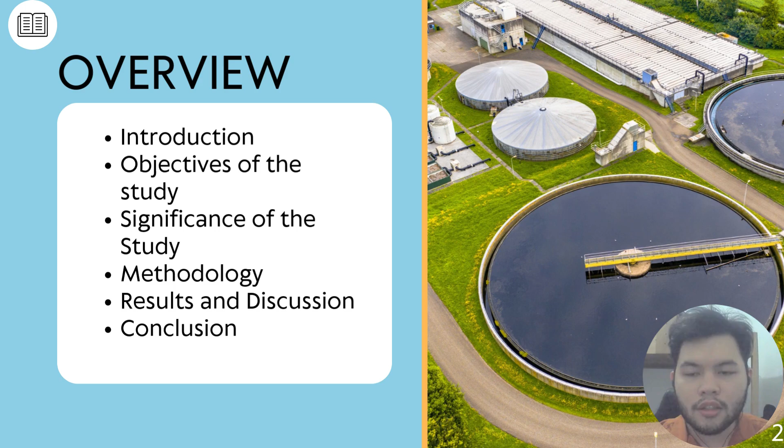Access to clean water is crucial for human well-being as it plays a vital role in ensuring food security, energy production, and economic development. Due to large increase in population, sewage wastewater became prevalent. The sewage wastewater contains pollutants that can significantly affect the environment. In the Philippines, there are 331 municipalities classified as waterless communities, where over 50% of the impoverished population lacks access to clean water, putting them at risk of illness. The Department of Interior and Local Government, or DILG, defines those communities as waterless communities.

The colloidal nature of wastewater makes coagulation flocculation an effective approach for sewage wastewater. The physical attraction between the negative charge of the contaminants and the positive charge of the coagulant induces solid-liquid separation.

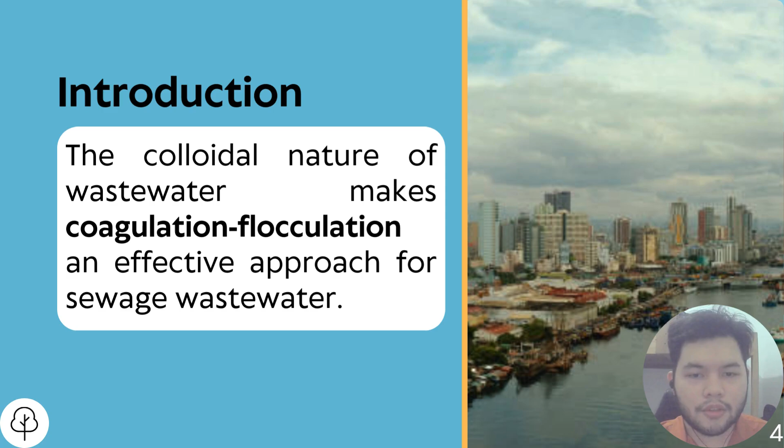Our study aims to optimize sewage wastewater treatment parameters, mainly pH level, coagulant dose, and settling time, using response surface methodology (RSM), specifically the Box-Behnken Design (BBD) model.

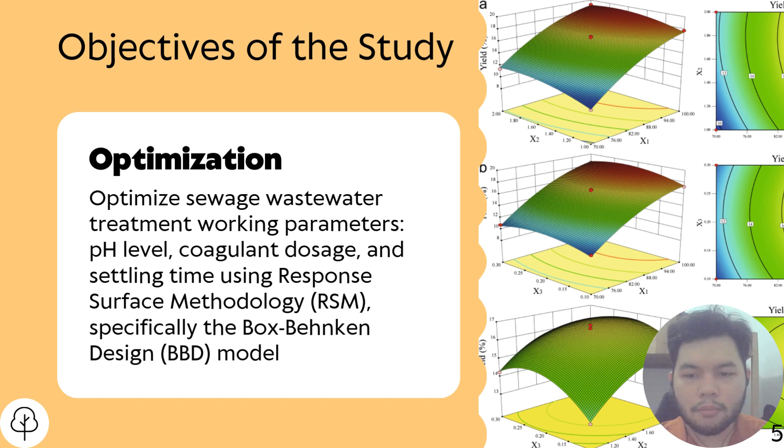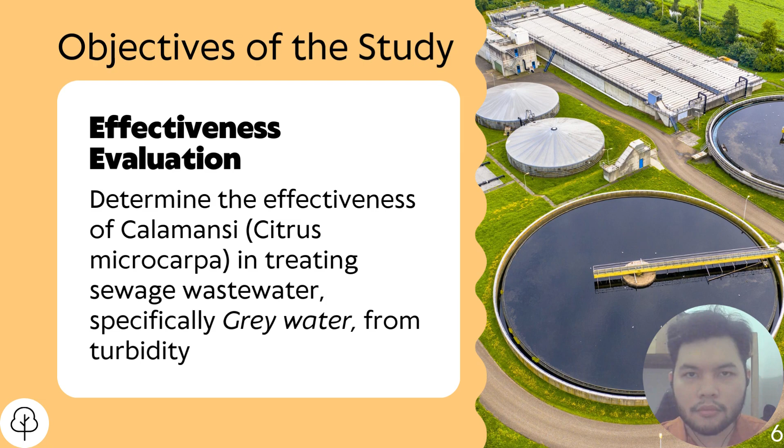Our study also aims to determine the effectiveness of calamansi in treating sewage wastewater, specifically greywater, for turbidity. Finally, our study aims to determine the biochemical oxygen demand and the chemical oxygen demand percentage upon determination of the optimal parameters.

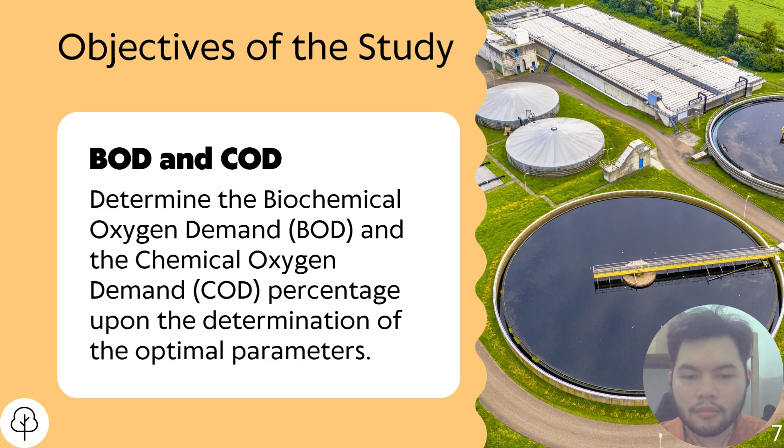As for the significance of our study, the proposed coagulant could be a cheaper and more sustainable alternative, and the coagulant could reduce the environmental impact of the treatment process of sewage wastewater. Our study could contribute to the research of natural coagulants as a viable, eco-friendly alternative for treating sewage wastewater.

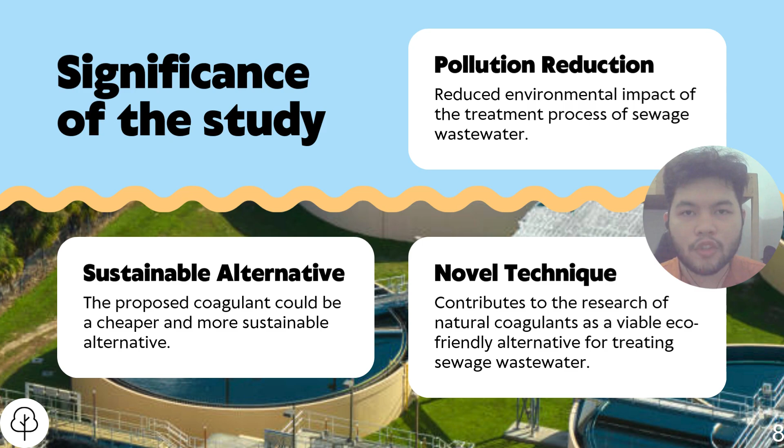This research also conforms with the Sustainable Development Goals mandated by the United Nations. The first goal is SDG 6, the Clean Water and Sanitation for All goal. Considering that our field of study is aimed towards wastewater treatment, the second goal is SDG 12, the Responsible Consumption and Production goal. By reusing calamansi waste, we promote a more sustainable way to treat wastewater.

The third goal is SDG 14, the Life Below Water goal. By reducing water pollution through effective wastewater treatment, and by using calamansi as a natural coagulant, it also helps in lowering harmful pollutants like BOD and COD, preventing water contamination, and protecting aquatic ecosystems.

The last goal is SDG 15, Life on Land. By promoting sustainable waste management, we reduce environmental pollution and also help protect land-based water sources and biodiversity with cleaner wastewater discharge.

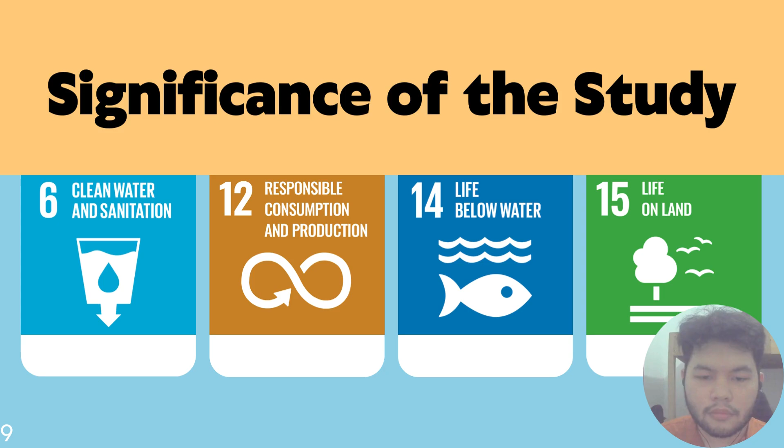For our methodology, the wastewater sample was obtained from the wastewater treatment plant located in Pasay City by providing sample containers to store the sample. The calamansi waste samples were obtained from local wet markets in Sucat, Parañaque City.

The obtained calamansi were subsequently processed as a natural coagulant. Additionally, the sample characterization of the wastewater parameters was done in a laboratory setting with the necessary equipment to proceed with the test.

MacUnion Laboratories Incorporated provided the wastewater sample analysis services to help provide data for wastewater parameters. The wastewater parameters such as COD and BOD are prominent in sewage wastewater, and wastewater sample analysis provides foresight as to what it may contain.

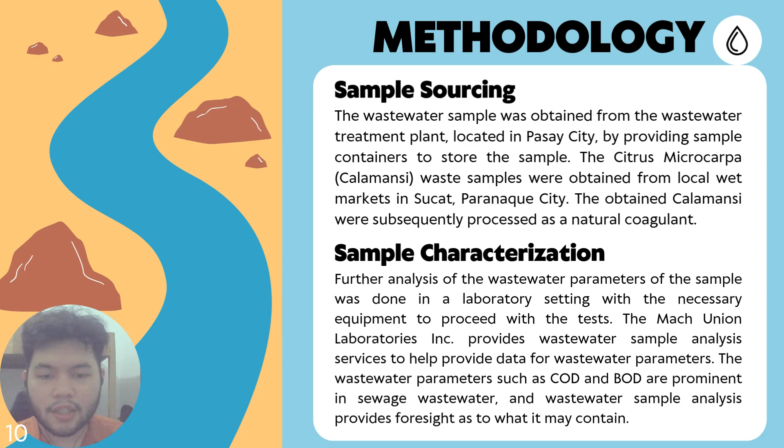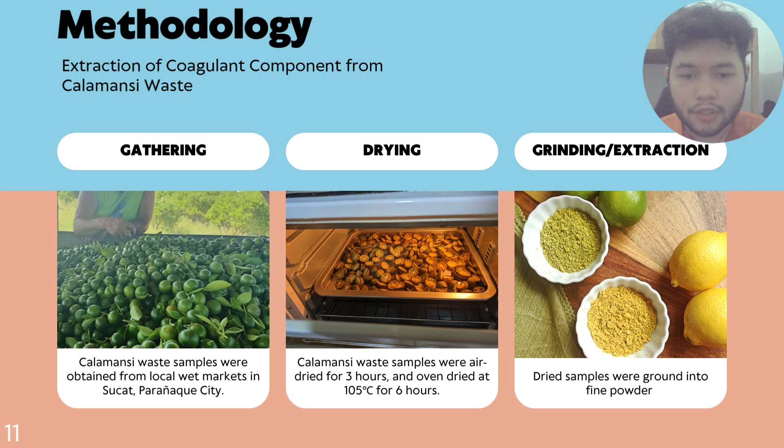As previously mentioned, the calamansi waste samples were obtained from local wet markets in Sucat, Parañaque City. The obtained waste calamansi were air-dried for 3 hours and oven-dried at 105 degrees Celsius for 6 hours, and the dried samples were grounded into fine powders.

For the coagulation process, this study used the Jar Test method to simulate the coagulation process with different parameters provided by the RSM-BBD. The Jar Test method is the most used method of wastewater treatment testing due to its simplicity. Each beaker was filled with wastewater samples.

The wastewater pH is also one of the varied parameters for this study, and to reach the target pH, sodium hydroxide or sulfuric acid were used to modify the pH level of the wastewater sample. For each standard run, 2 trials were performed to improve data accuracy.

Subsequently, the coagulant is added in a specified coagulant dose and stirred continuously at a mixing speed of 100 rpm within 30 minutes. After coagulation, the treated wastewater was subjected to settling for a specified settling duration prior to sample collection. The optimal result was based on turbidity removal efficiency.

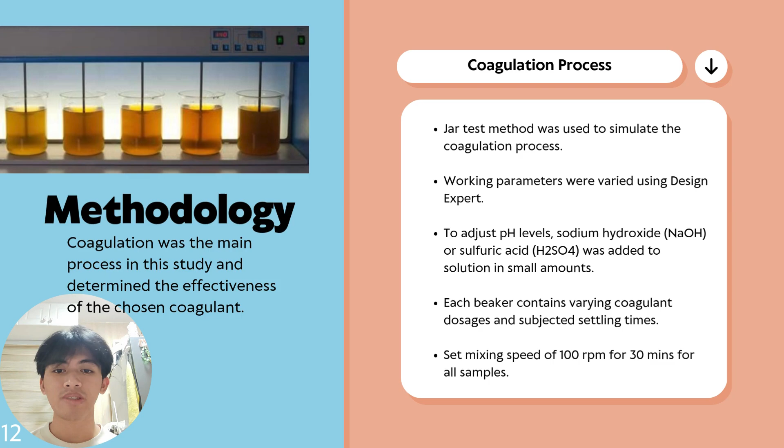The Box-Behnken Design model is a statistical model on response surface methodology that requires only 3 experimental design points: minimum, midpoint, and maximum, with 3 different input parameters: pH level, coagulant dosage, and settling time. 17 actual runs were conducted with varying pH levels of 5 to 9, coagulant dosage of 30 to 50 mg per liter, and settling time of 30 to 60 minutes.

The RSM-BBD optimization and model validation: the optimized conditions generated by the RSM-BBD model will be used to validate the efficacy of the model to describe the coagulation system. 3 confirmatory runs will be conducted to compare the actual removal efficiencies with the predicted removal efficiencies given by the RSM-BBD model.

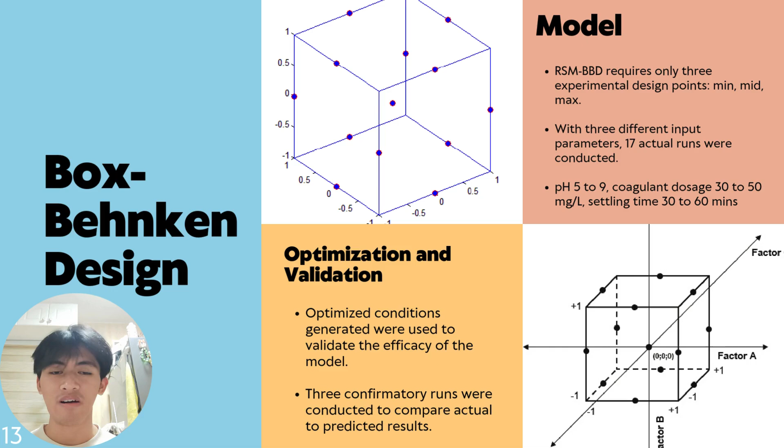For the BOD and COD removal using optimized conditions, after optimization and model validation, the optimum conditions were used to determine the BOD and COD removal efficiencies in the treatment of the sewage wastewater via coagulation using the calamansi waste coagulant.

Liquid analysis: the turbidity was analyzed via turbidimeter, while BOD and COD contents were tested using the services Mach Union Laboratories Inc. provided. After the wastewater treatment was conducted, the optimum parameters that yielded the best turbidity removal results were tested for COD and BOD compared to its previous data.

So here we are in the results and discussion. The turbidity removal efficiency resulting from calamansi coagulation from the different runs generated by the RSM-BBD model is shown in Table 2. Maximum efficiency of 88.19% is obtained at standard 10 with a pH level of 7, coagulant dose of 50 mg per liter, and 30 minutes settling time. In contrast, a minimum efficiency of 55.30% is obtained at standard 2 with a pH level of 9, coagulant dose of 30 mg per liter, and settling time of 45 minutes.

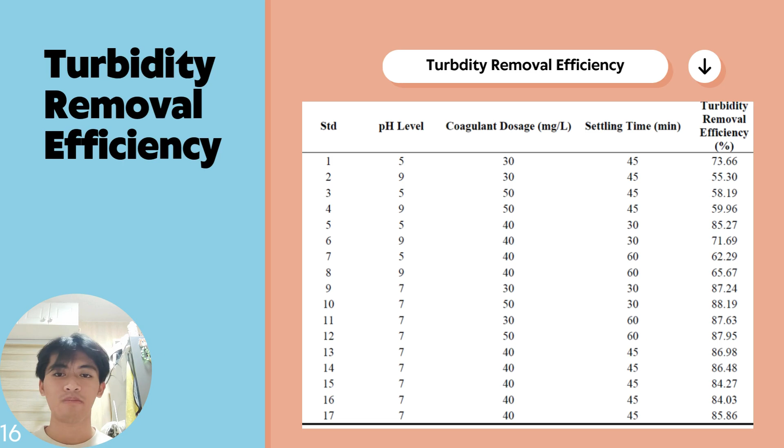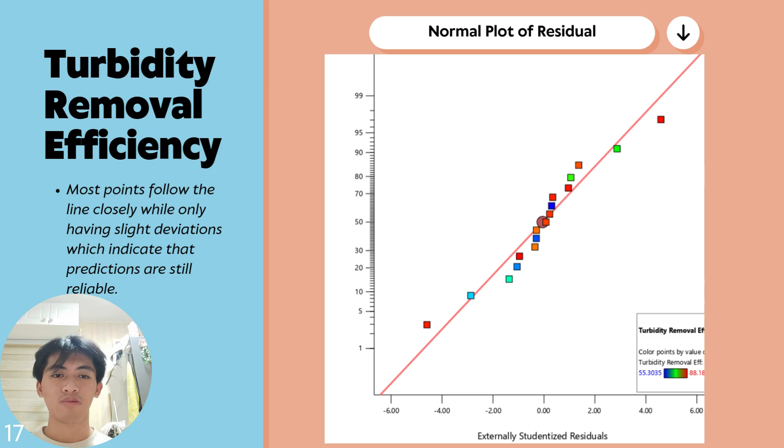The normal plot of residuals shows most points follow the line closely, with other points having slight deviations, which indicate that the residuals are approximately normally distributed. This suggests that the assumptions of normality are largely met, which would also mean that predictions are still reliable.

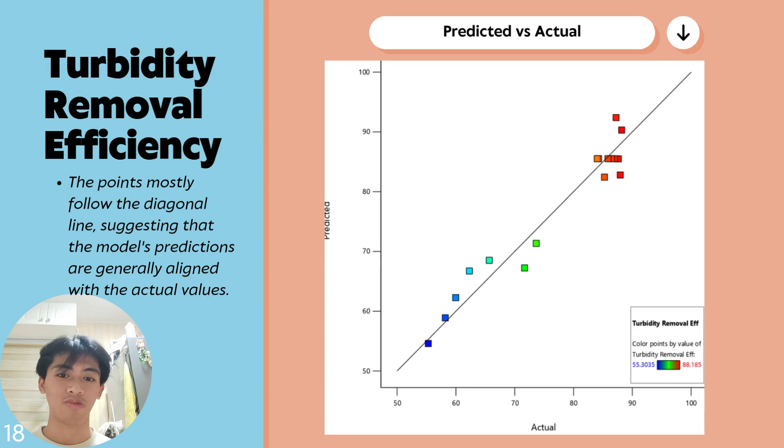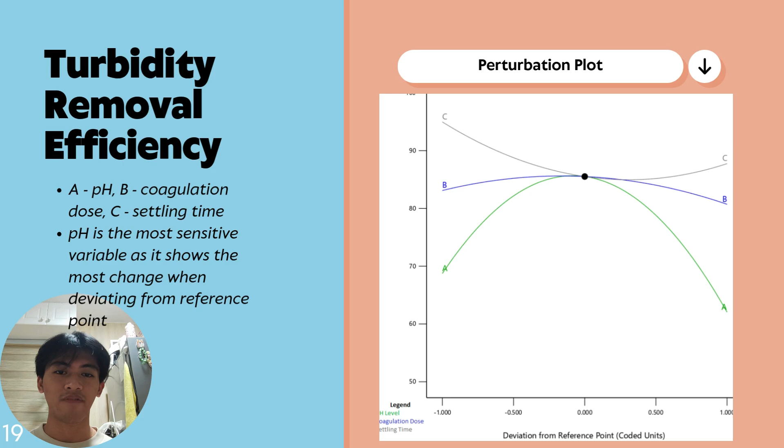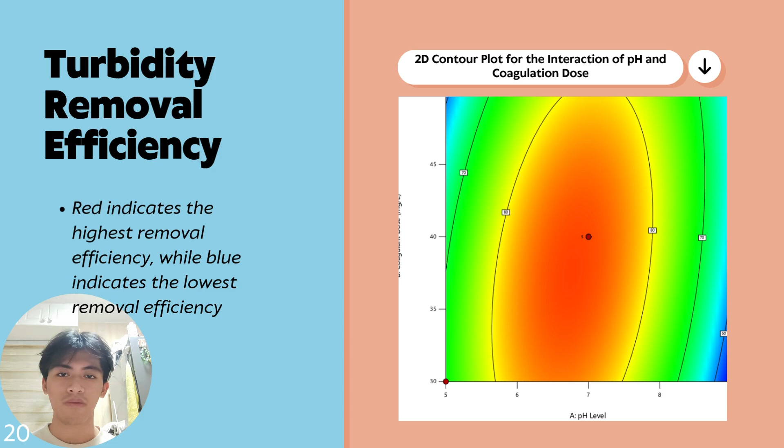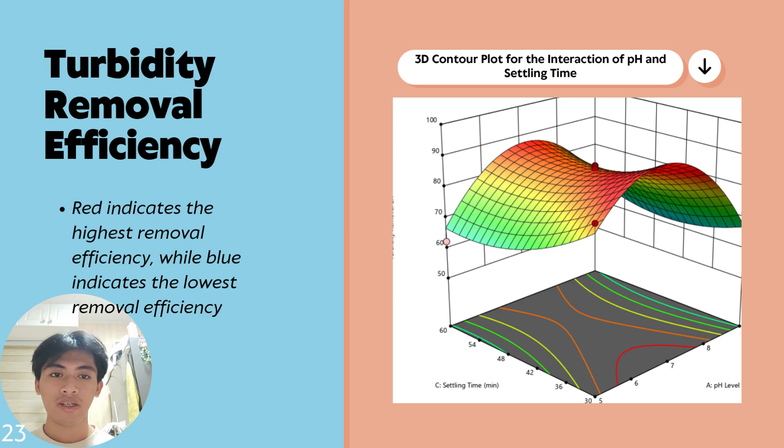Here is another 3D contour plot, but for the interaction of pH and settling time. The same can be said here, where it gives a more detailed visualization of the 2D contour plot just shown.

The RSM-BBD optimization: after the experiments that provided the results discussed beforehand, RSM-BBD provided optimizations to the turbidity removal efficiency, generating 100 solutions to achieve optimal results. The selected optimum condition is shown in Table 5, which was verified in 3 confirmatory runs. The resulting data were collected and compared to the values provided by the RSM-BBD. The results are as shown in Table 6.

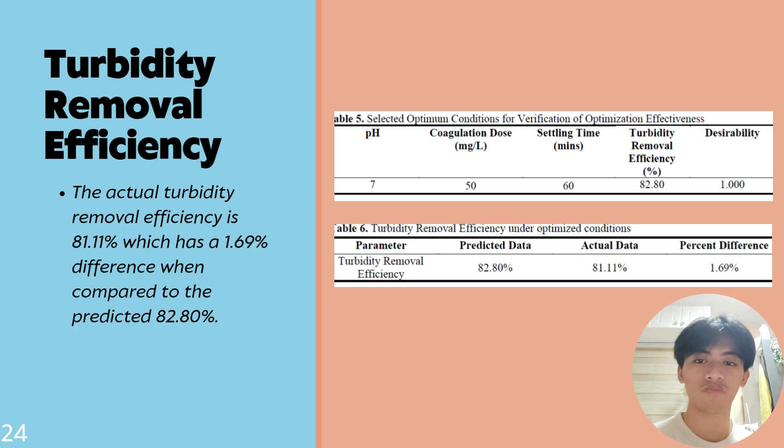The actual turbidity removal efficiency is at 81.11%, which is a 1.69% difference when compared to the predicted 82.80%. While this differs from the predicted value, it does not deviate too far, which shows that the results confirm that the identified parameters were effectively optimized for the removal of turbidity in the wastewater.

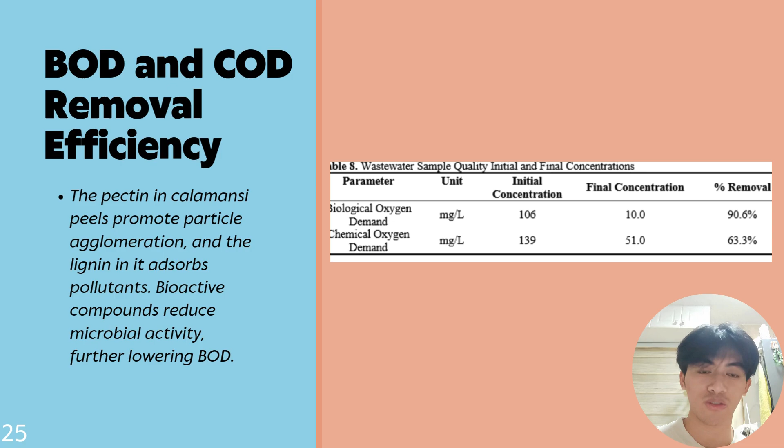A test was also conducted to determine the final BOD and COD values of the treated wastewater using the selected optimized parameters, which resulted in a 90.6% removal of BOD and a 63.3% removal of COD. The pectin in calamansi peels promote particle agglomeration, and the lignin in it adsorbs pollutants. Bioactive compounds reduce microbial activity, further lowering BOD, thus supporting the result.

Now for the conclusion: the experimental results highlighted that pH, coagulant dosage, and settling time significantly impact turbidity removal efficiency, with settling time being the most influential factor in the coagulation process. The quadratic model developed through the RSM-BBD analysis showed a strong correlation with the experimental data, confirming the importance of these variables and their interactions.

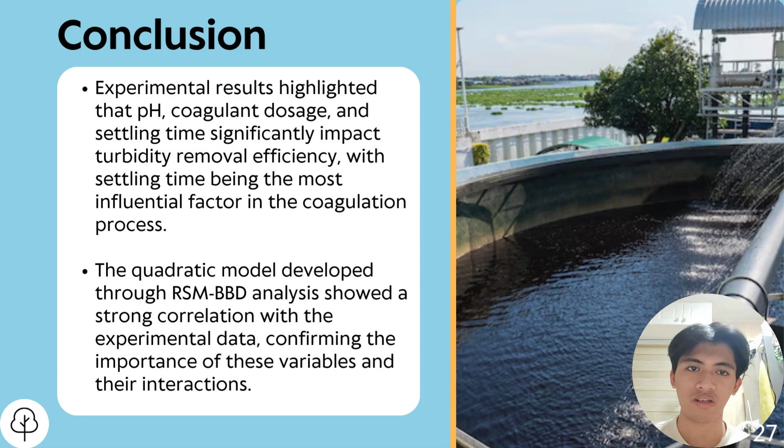The optimal conditions were determined to be a pH of 7, a coagulant dosage of 50 mg per liter, and a settling time of 60 minutes. Using the selected optimal parameters, the process was expected to achieve a predicted turbidity removal of 82.80%, comparing the predicted removal efficiency to the observed value of 81.11%. The percentage difference for turbidity removal efficiency is around 1.69%.

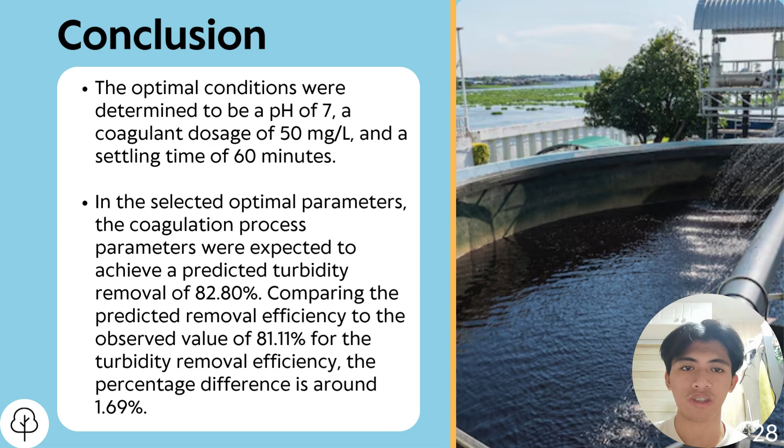This study demonstrated the effectiveness of calamansi waste as a natural coagulant for wastewater treatment. Using the RSM-BBD model, optimal conditions for turbidity removal were identified and validated. The findings highlighted the role of pH, coagulant dosage, and settling time in treatment efficiency. Significant BOD and COD reductions suggest calamansi-based coagulation as a sustainable alternative, supporting further research on its scalability and application.